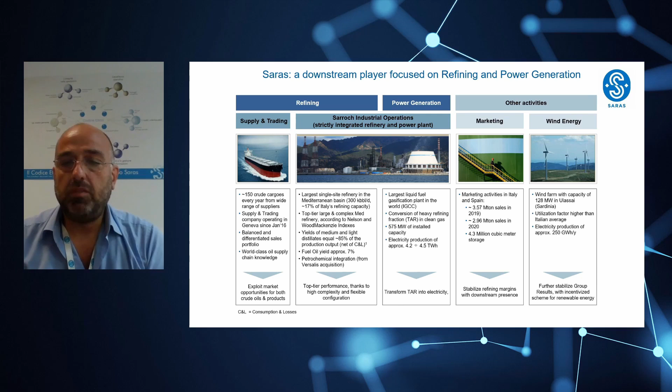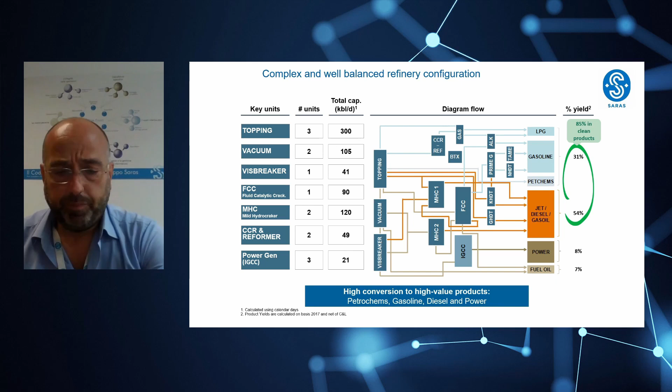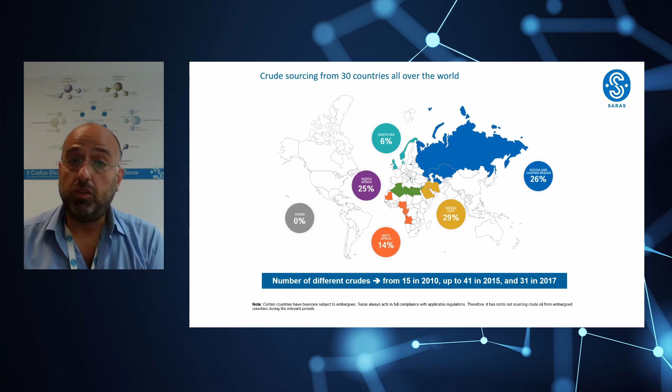This is a simplified scheme of our refinery, which has 3 topping units, 2 vacuum, a visbreaker, and 1 FCC, 2 hydrocrackers, a CCR, 2 reformers, and the power generation plant. This is a very simplified scheme, and as said before, this is a simplified yield scheme. Which crudes do we process? We process crude from all over the world, and basically from 2015 till now we processed more than 40 crudes, very different in country of origin and characteristics.

So thank you, Andrea, for the presentation of SARAS Group. I'll now briefly introduce Petroval Company. We are providing solutions worldwide for every refining and petrochemical industry. We have more than 30 years experience working in more than 50 countries in the world. We have most of the international safety certifications, and we employ only long experienced people with more than 30 specialists available around the world. We are specialized in 2 specific departments.

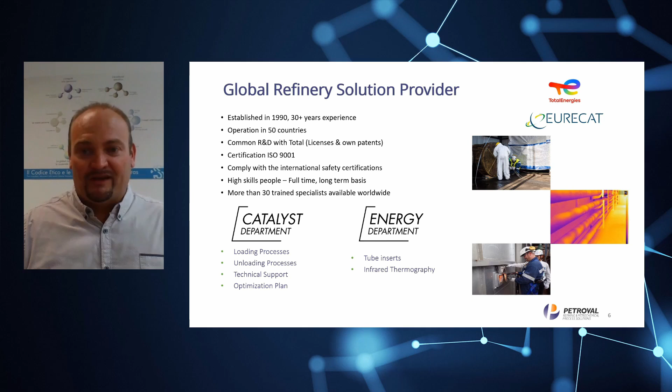The catalyst department, dealing with all the loading and unloading process and technical support of fixed bed reactors. And then the energy department, that is my side, taking care of tube inserts for heat exchangers and infrared thermography for furnaces. We will talk today about tube inserts for heat exchangers.

We have these kinds of technologies that can provide significant improvements in terms of fouling mitigation, but also in terms of heat transfer improvements. And when we combine these 2 effects, we can typically provide significant energy savings that will be converted also into reduction in CO2 emissions. And we will see in detail what we can reach.

We have 3 technologies. The first one is called Fixotal. This one is a fixed device that is generating turbulence in the feed and that generates the renewing of the boundary layer at the tube wall. And by doing so, we have a significant effect on the fouling deposition, especially when it is related to wall temperature. And we also have a good impact in terms of heat transfer improvement because of this extra turbulence that we generate.

We have then 2 technologies that have a mechanical cleaning effect. We have the Turbotal on the left that is rotating inside the tubes. So this is combining a mechanical effect of brushing the tube walls with the increase in turbulence. And then on the right side, we have the Spirelf that is fixed on both ends and is vibrating inside the tubes. So this is also generating some brushing of the tube walls and an increase in turbulence level.

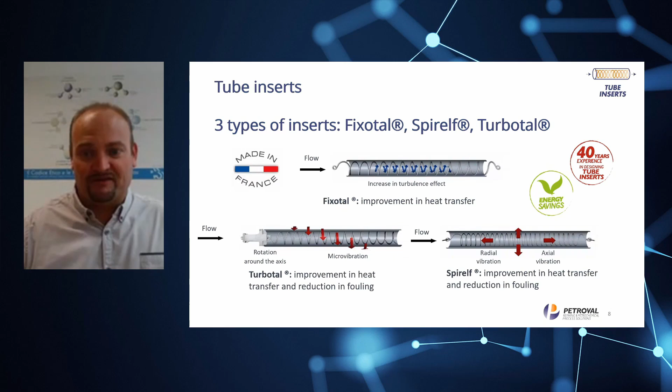So these are all three technologies, and we will see now applications at the SARLUX refinery. We have 3 Turbotal applications there, and we will present the results of these applications. What you see is a short video of the Turbotal rotating. Depending on your internet stream, it may be slowed down, but you have to know that it is typically designed to rotate at about 1000 RPM during normal operation.

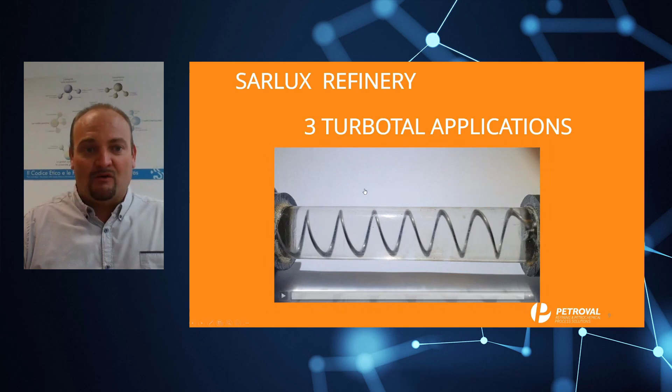I will present to you now the first case study. So we have 3 applications of 4 heat exchangers on the 2 topping units in SARAS refinery. So for each of these cases, we will show you the fouling factor evolution on the left. And below, we will show you the overall heat transfer performance, that is comparative runs that we will show to identify the benefits of these applications.

So on this first train, we had 4 exchangers equipped, and we had a fouling rate divided by 2 on the first run. That's the black line with the red dots. So we see there was one recirculation during that period, but that did not affect, and it was the same inserts. And then we had a second run in 2020, during which the fouling rate was divided by 4. But that was also thanks to an upgrade on the design to also be able to comply with low flow rate performance. Typically, when the flow rate is reduced, we need to slightly modify the design to improve the performance.

So if we compare the level of improvements in terms of heat transfer, at the start of the run, we were on the first run 20% higher, but on the second run, we were 60% higher, thanks to this new design. And when we look on the same period as the original reference run, that was about 200 days, we see that after 200 days, we are about 80% higher after the first run. And on the second run, we were about 180% higher than the reference run. And then when we went until the end of the first run with Turbotal, we identified that we were still 25% higher after 4 years, compared to the reference run after 200 days.

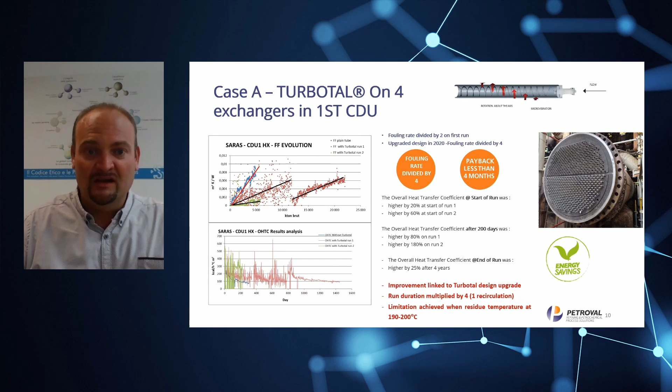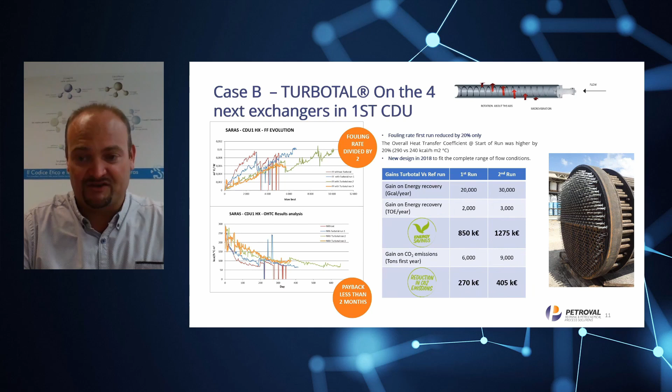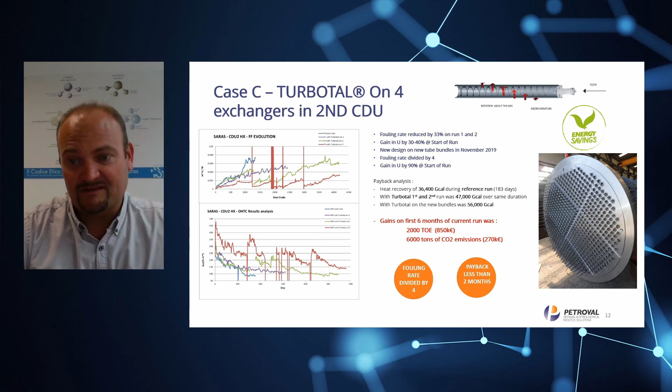So that's another case where we see that with retrofitting of tube inserts in this kind of exchangers, when we select the right exchangers, we can really provide very interesting improvements. And the paybacks are very short because of the amount of energy recovered and the CO2 emissions reduced. That makes very, very short paybacks.

So to conclude, we will just highlight that we had to redesign the inserts to fit with the real flow conditions, to comply with the range of crude density from 0.84 to 0.92 and viscosity, and also to fit with the range of operation from 60 to 100% of the design capacity. Because of this COVID situation, many refineries have been forced to operate at very low flow rates, and that has an impact on the rotation speed of the inserts, of course. So that's why we really need to anticipate any low periods or high periods to update the design and identify the best compromise to fit the larger range of flow conditions.

Thank you, Nicolas. Just a short recap of the achievements we obtained in the Sarlux refinery. Basically, the fouling rate was more than halved compared to before. We had for sure more flexibility in operation, in the sense that we had less pressure drop increase in the heat exchanger train, and of course more heat transfer performance. We had a substantial energy recovery. In fact, the payback of this insert is just a few months. And of course, we also use less fuel, and so a reduction in CO2 emission.

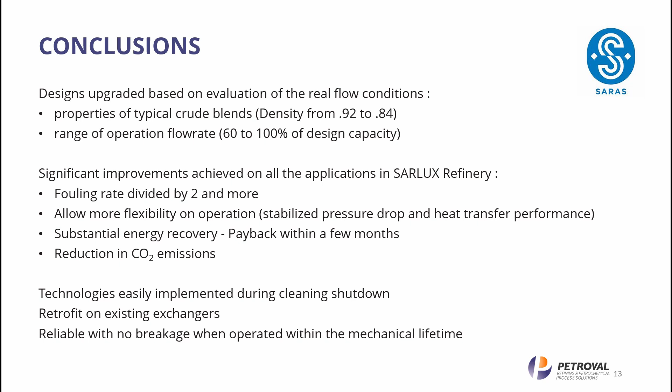Yeah. And as we know, this technology can easily be implemented during the cleaning shutdowns. The installation is very short and there is no hot work necessary. It can be retrofitted to existing exchangers, and we can also do it for new designs. And this is really reliable. There is no breakage during normal operation and within the mechanical lifetime. As with every mechanical piece, there will be some erosion during the runs because of the mechanical cleaning effect, but it is perfectly controlled with no damage to the tube itself. So when we operate within the normal range of flow conditions, there is clearly no risk for the operations.